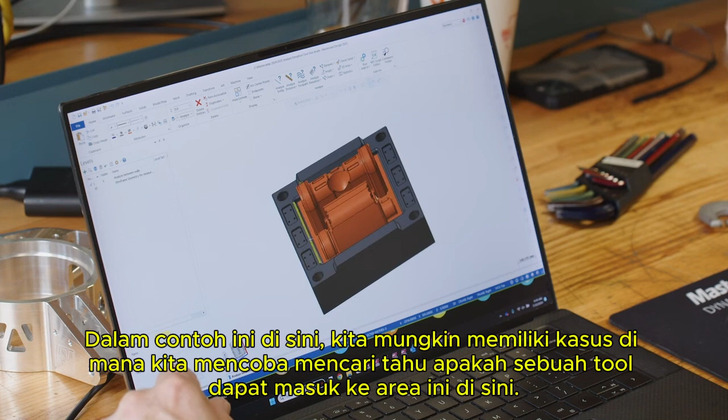In this example here, we might have a case where we're trying to figure out if a tool can fit into this area here. So what would we need to do? Without the Analyze Deviation tool, we can right-click and choose Analyze Distance. But if we did that, remember, we need to pick geometry to measure between. And depending on the entities that's on your screen, you may not have that. So what do we need to do? We actually need to spend some time to create geometry.

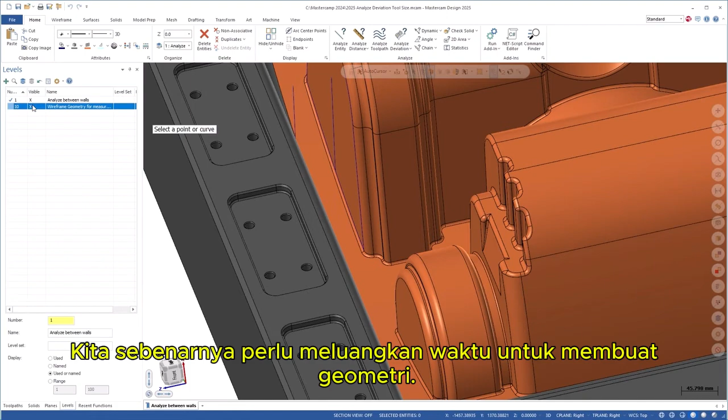Now, conveniently, I have geometry already created on a level, and I just turned it on. But now I can pick, for example, that point to, let's just say, another point here, like this point here, right? And you can see that, okay, this is 50 millimeters, right? But I had to create that geometry to do it.

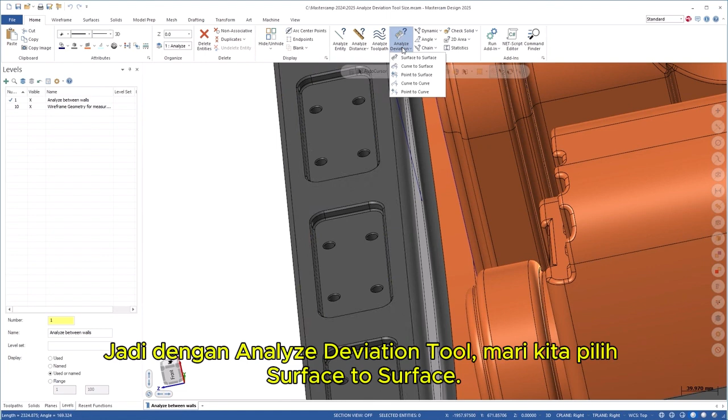So with the Analyze Deviation tool, let's choose surface to surface. I'm going to pick that surface as one entity, hit End Selection, and this surface as the other entity. And we get our Analyze Deviation function panel, but we don't see any measurements. And this is really a good point to kind of stress here. Currently, my maximum deviation is set to 20, right? So anything larger than that, it's not going to show.

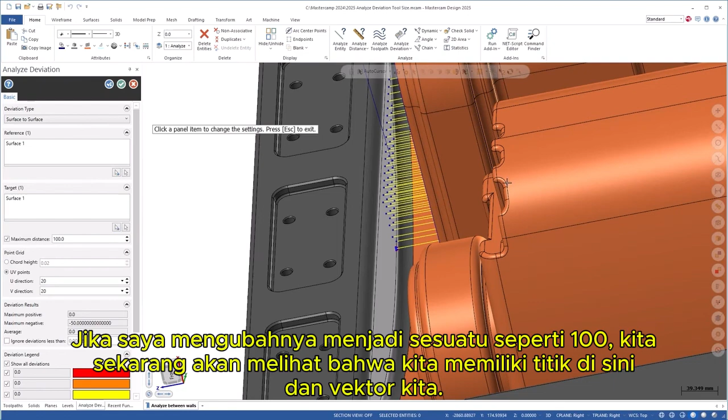If I change this to something like 100, we'll now see that we have our points here and our vectors, and I can hover over any one of these, and it indicates that I'm at 50 millimeters. But all of these show that. So that also tells me that this is parallel, right? Or these two walls are not tapered at all.

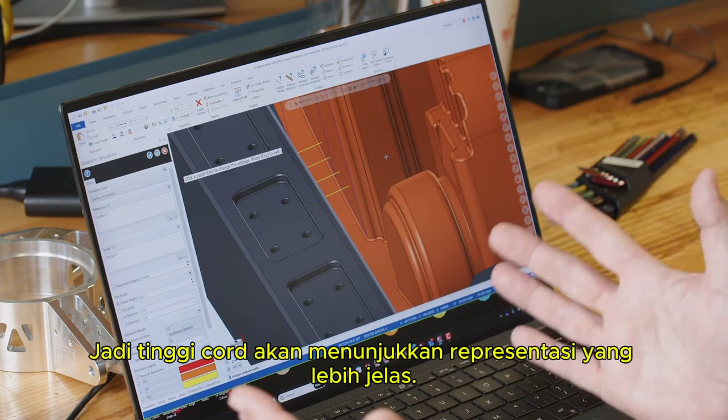I could also change it to a chord height, which will simplify it, because in this case, these surfaces are pretty flat, so the chord height will kind of show a more clear representation of it. So that's just one good example. Let's look at another one now.

So in this particular file, we see that we have darker gray surfaces, right? So the darker gray surfaces here, that's the original geometry. I also have orange surfaces on a separate level, and these orange surfaces represent mating faces on another part, okay? Now, this is going to be a press-fit scenario, so when they're together, these things are going to be pushed. And for this particular application, they need to be within 1/2 millimeter from the original, right? So I need to make sure that this orange surface is within 1/2 millimeter of the gray surface.

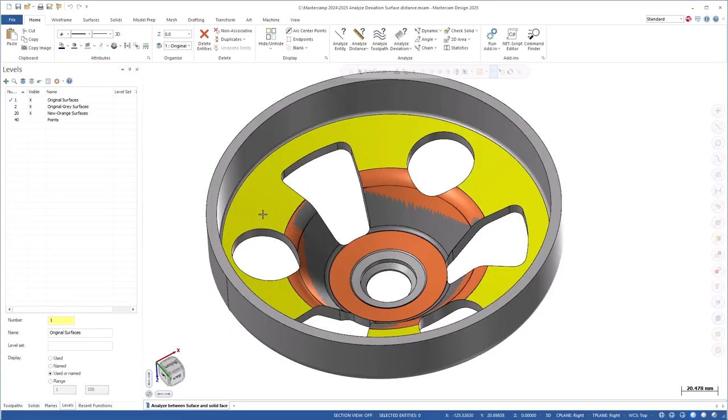We also have these points here, and these 2 points are critical locations, and they need to be within 0.1 millimeters from the original. And again, this is a press-fit scenario, so that's what we need to make sure, is that these values are not going to be deviating too far from the original. So using Analyze Deviation, we're going to start with surface to surface.

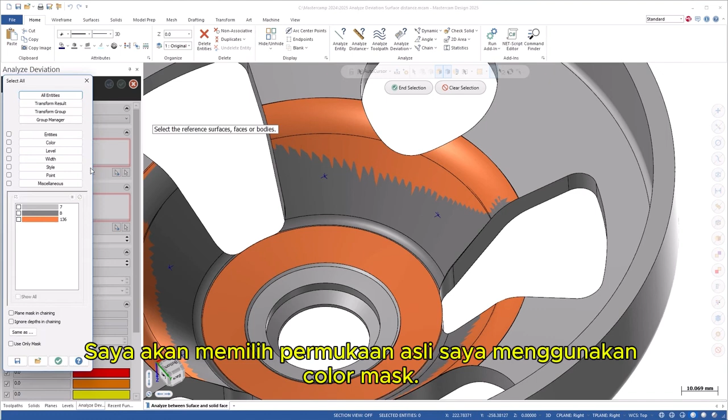I'm going to pick my original surfaces using the color mask. I'm just going to choose the dark gray. I'm going to hit End Selection or Enter. And then I'm going to choose, for the second set of surfaces, they're going to be orange, the new surfaces. And when I press Enter, we'll see that we have our point grid shown here. And since our point grid is set to chord height, we see the value here.

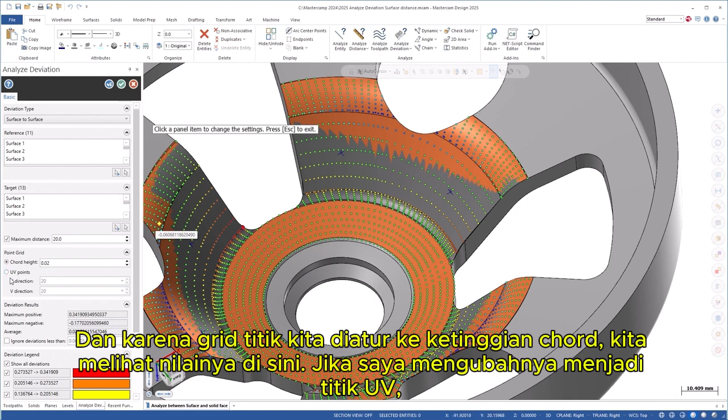If I change it to UV points, now the points are going to be spread out really along the UV curves of those surfaces, which is kind of why you see that twisting there. And if I hover over any of these points, I see a 0.07, I see a negative 0.1, I see a positive 0.3.

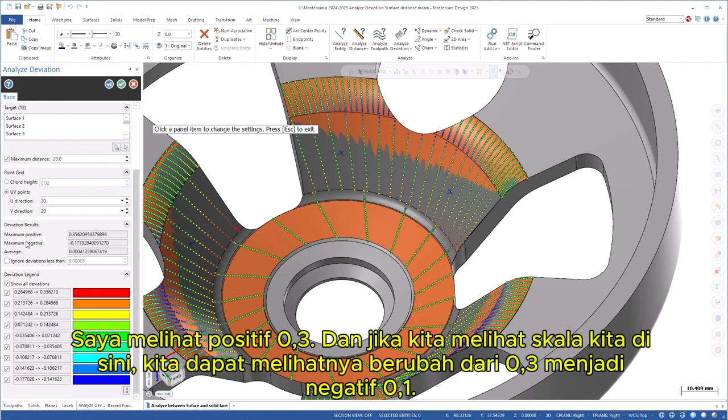And if we look at our scale here, we can see it goes from 0.3 to negative 0.1. And even up top, we see the maximum and the minimum positive and negative values. It's 0.35 to negative 0.1. So they're all within our 0.5 deviation. Now let's look at the points.

So if I do Analyze Deviation and I do point to surface, one key thing to identify here is our function prompt is telling us to select the points. I'm just telling you that because it's asking for the points first, right? So you might be wondering why you can't pick a surface. I've got to pick the points first. So there and there. And now it's asking for the surfaces.

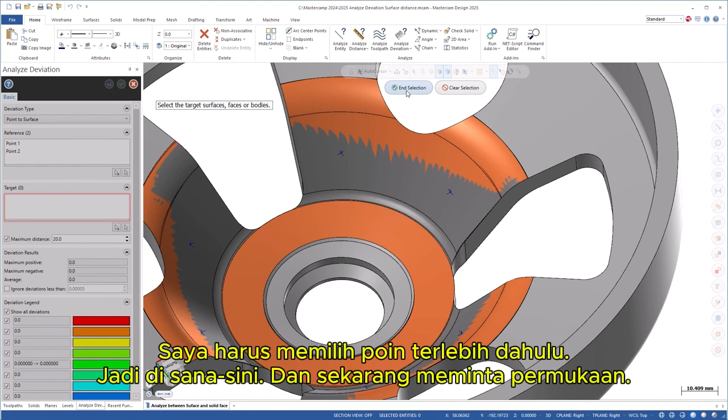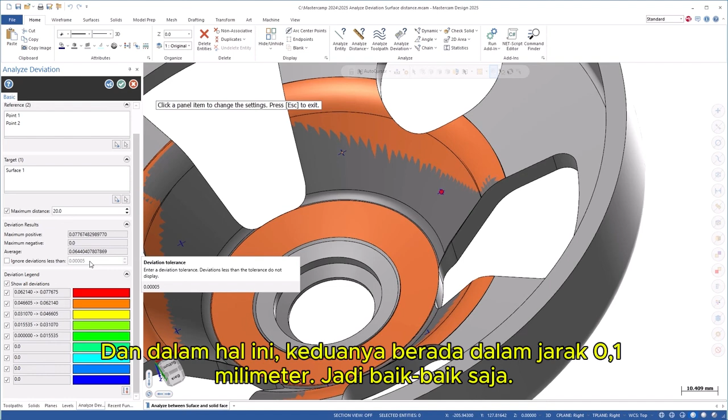Well, the original surface was the gray one, right? So we're going to see how close these points fit to that gray surface. And if I hover over these values, you see this is 0.05 and that's 0.07. And you can see with our grid here, we see the maximum and the average. And in this case, they're both within the 0.1 millimeters, so we're good. So this is measuring between a surface and points.

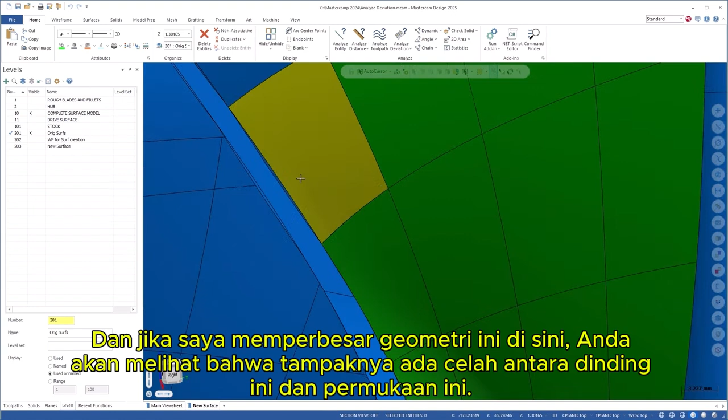Now, one last example here. We're going to bring up this analyze deviation file, which is this blade file that we showed in the What's New video. And if I zoom in on this geometry here, you'll notice that there appears to be a gap between this wall and this surface.

Now, we don't know if there's a gap there. This is a pretty old file, and I've seen CAD files where the display is set to simplify the display so it appears to be a gap, but there really isn't. In this case, there is, and I can check that. I can specifically measure that.

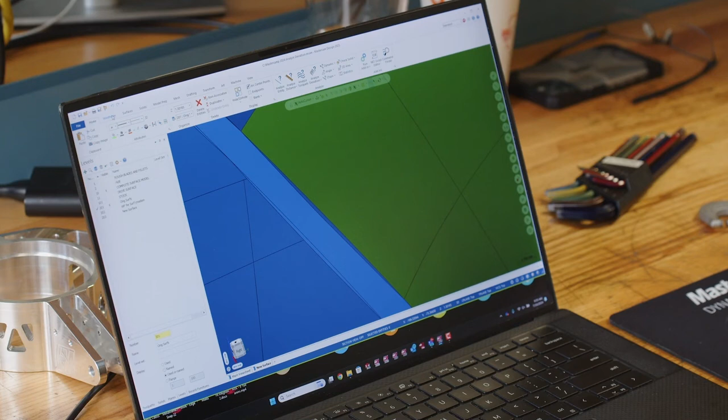So I'm going to go to the Wireframe tab. I'm going to create a curve on one edge. I'm going to create a curve on the edge of this green patch and then of this blue patch. So I have two curves. Now let's measure between them using Analyze Deviation on the Home tab. And I'm going to choose Curve to Curve.

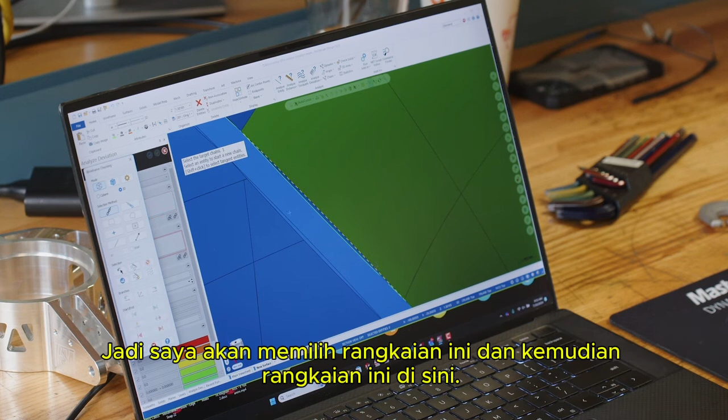Now we're doing a simple chain here, right? So I'm going to select this chain and then this chain here. And as you can see, we get our grid. If I zoom in here, we can hover over any one of these and see the deviation values. In this case, it's 0.28 and some change, so 0.28 millimeters distance between these curves at the maximum value. So this just shows how we can measure the difference between these curves.

Okay, so as you can see, this is an extremely versatile tool. Think of it more as a measuring tool. And the next time you find yourself creating geometry because you need to measure some entities, consider instead using the Analyze Deviation tool.